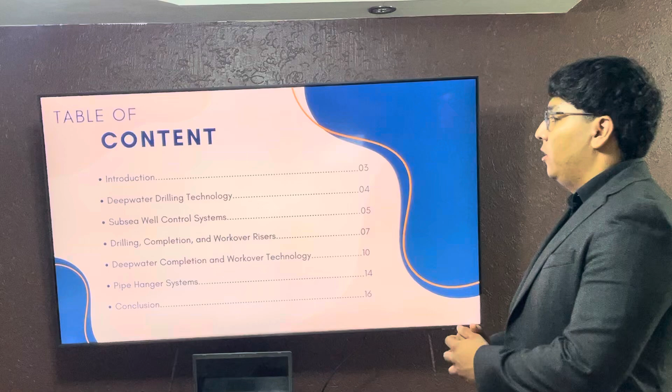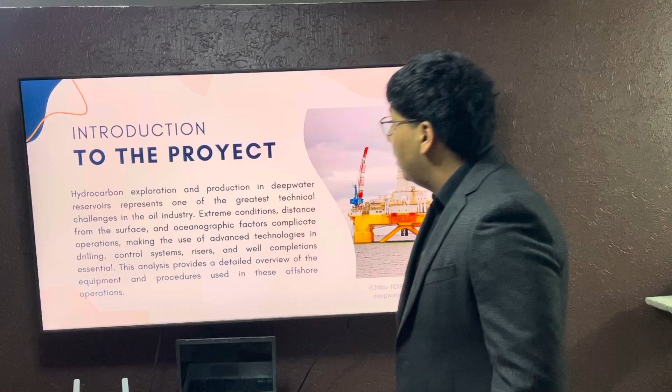For the table of contents, we have first an introduction, next deep water drilling technologies, subsea well control systems, drilling, completion and workover risers, deep water completions and workovers technology, pipe hanger system, and to finish we have a conclusion.

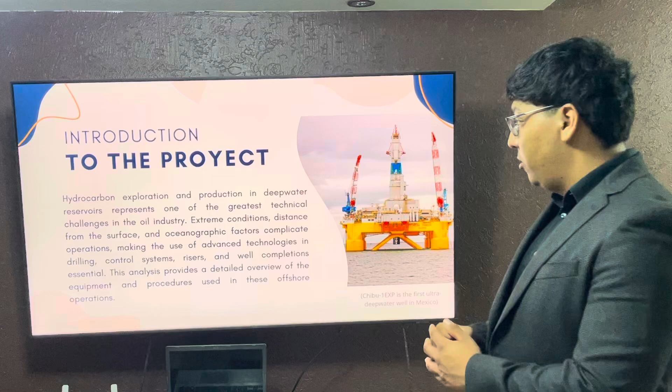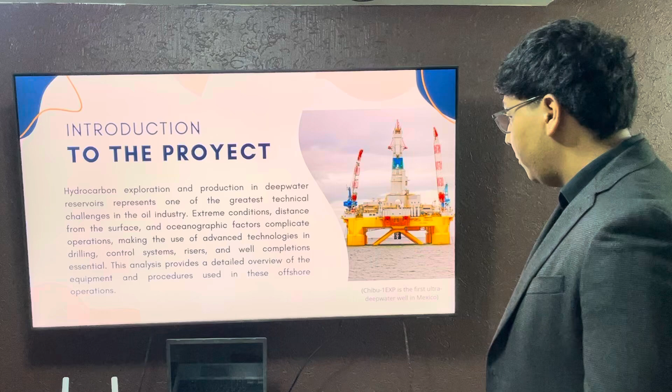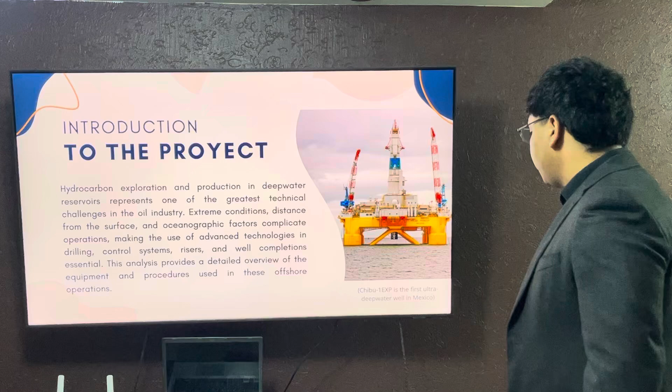For the introduction to the project, hydrocarbon exploration and production in deep water reservoirs represents one of the greatest technical challenges in the oil industry. The extreme conditions, distance from the surface, and oceanographic factors complicate the operations, making the use of advanced technologies in drilling control systems, risers, and well completions essential. This analysis provides a detailed overview of the equipment and procedures used in these offshore operations. And we have an image of the first ultra deep water well in Mexico.

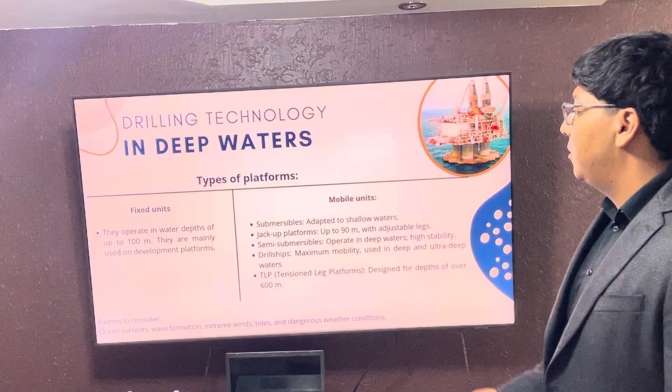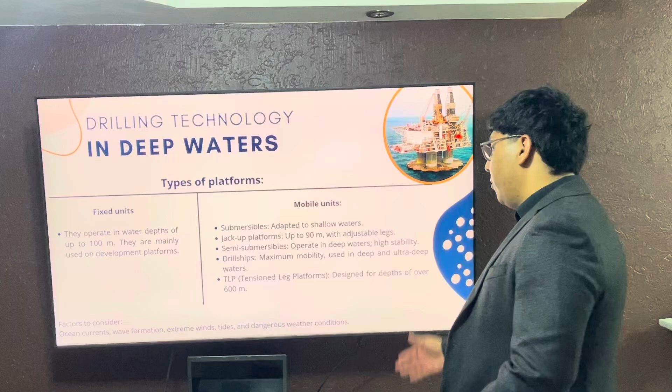Next, in drilling technologies in deep water, we have two types of platforms. Fixed units operate in water depths of up to 100 meters, and they are mainly used on development platforms. For the mobile units, we have submersibles adapted to shallow waters, and jack-up platforms up to 90 meters with adjustable legs.

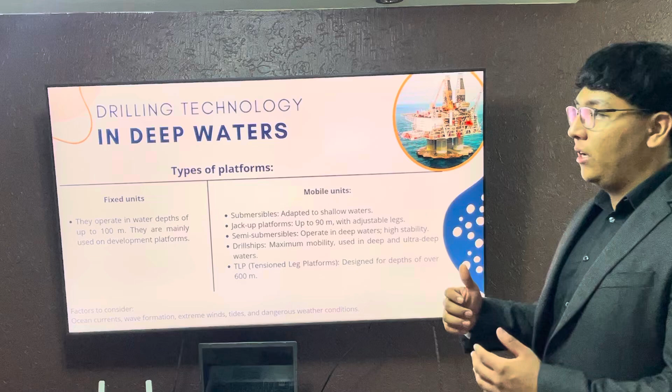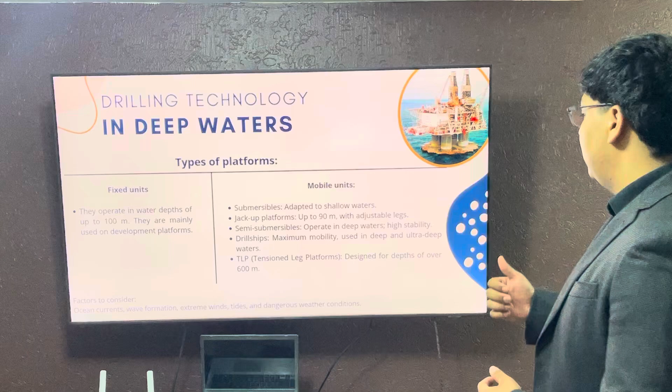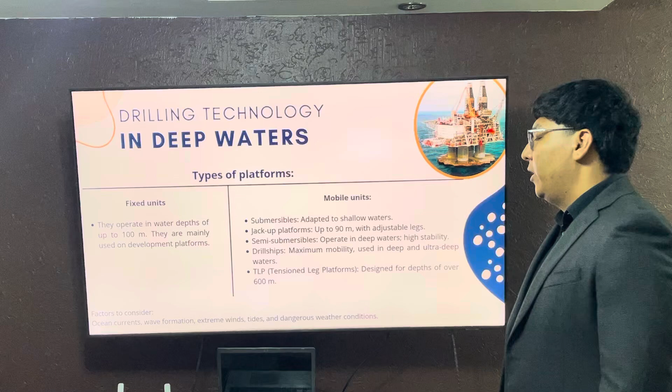Semi-submersibles operate in deep waters and have high stability. Drill ships have maximum mobility and are used in deep and ultra deep waters. And to finish, we have the TLP, that is, tension leg platforms, designed for depths of over 600 meters. For the factors to consider, we have ocean currents, wave formations, extreme winds, tides, and dangerous weather conditions.

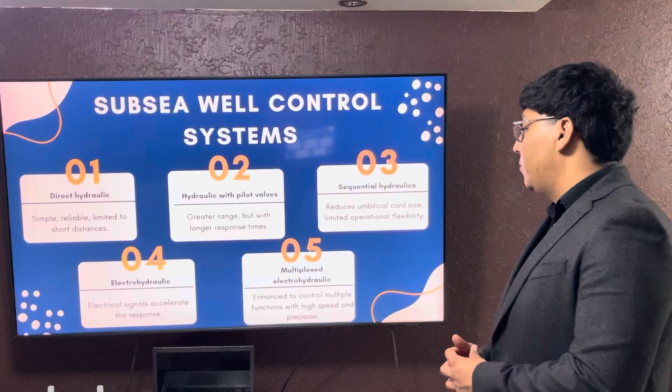In subsea well control systems, we have direct hydraulic, which is simple, reliable, and limited to short distances. Next, we have hydraulic with pilot valves, with greater range but longer response times. Next, we have sequential hydraulics, which reduce the umbilical size but limit operating flexibility.

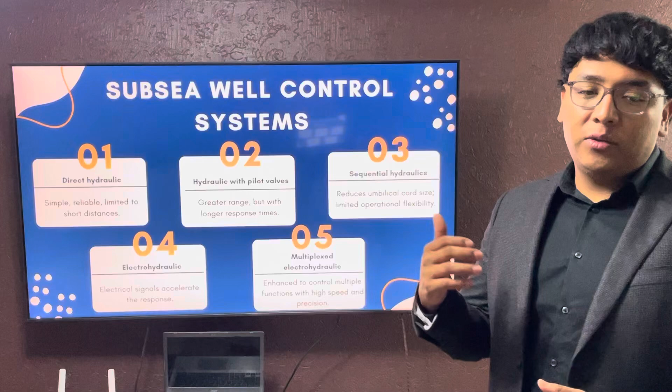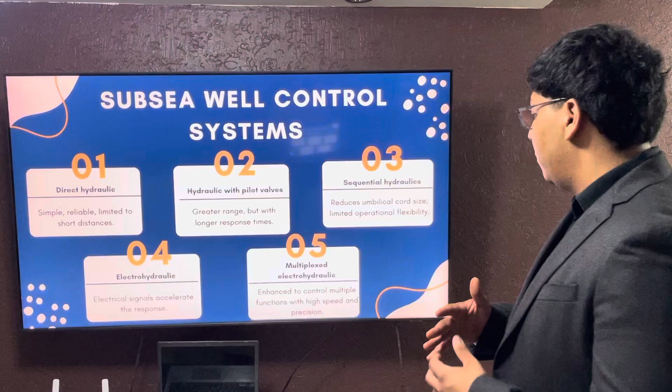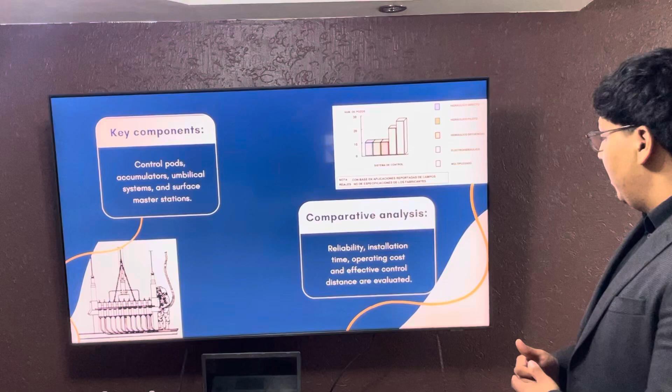In the case of electrohydraulic, it uses electrical signals to accelerate the response. And finally, multiplex electrohydraulics is in charge of controlling multiple functions with high speed and precision. Some key components are control pods, accumulators, umbilical systems, and surface master stations. In the comparative analysis, reliability, installation time, operating cost, and effective control distance are evaluated.

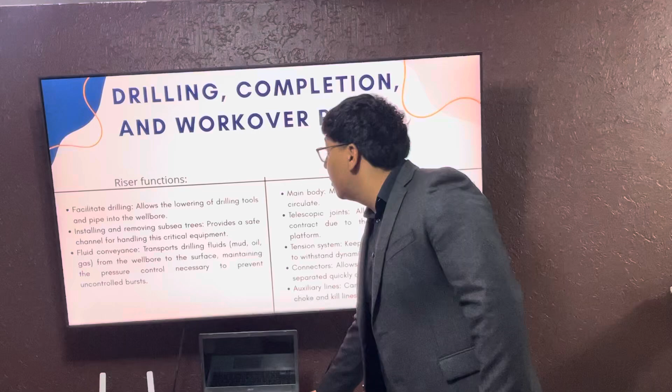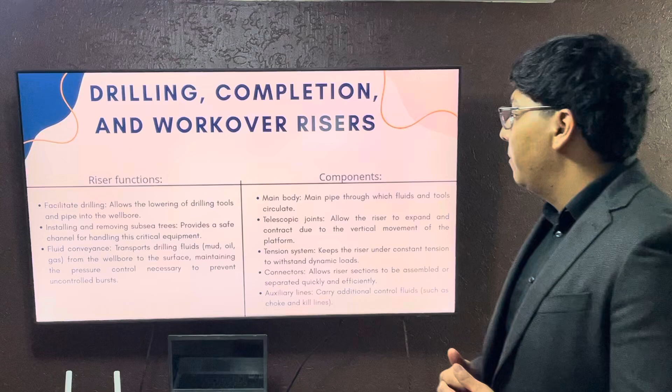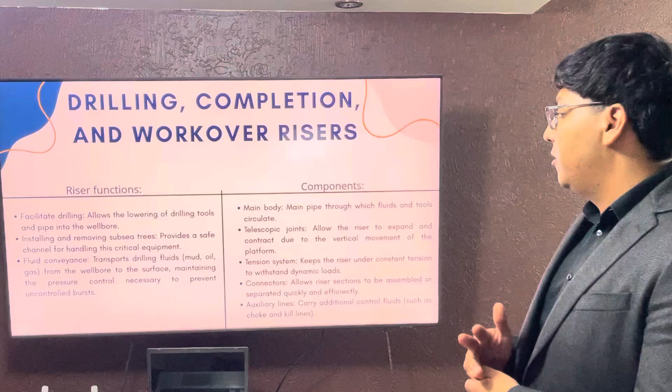Now, for drilling, completion and workover risers, the riser functions: it facilitates drilling, allowing the lowering of drilling tools and pipe into the wellbore, and installing and removing subsea trees, providing a safe channel for handling this critical equipment.

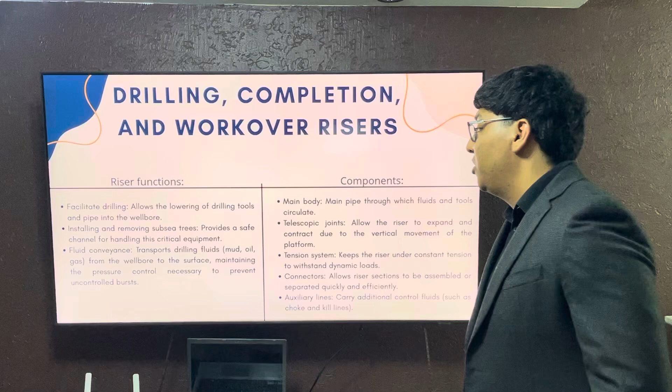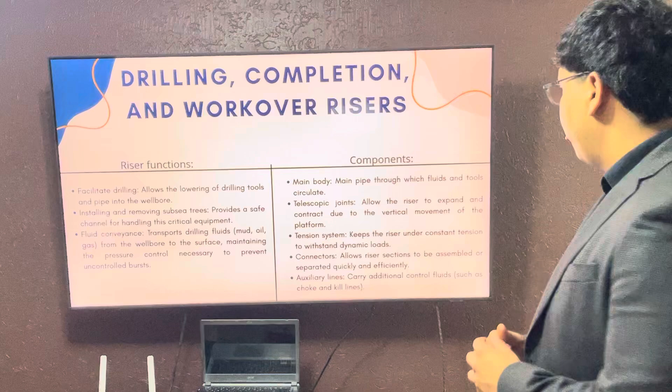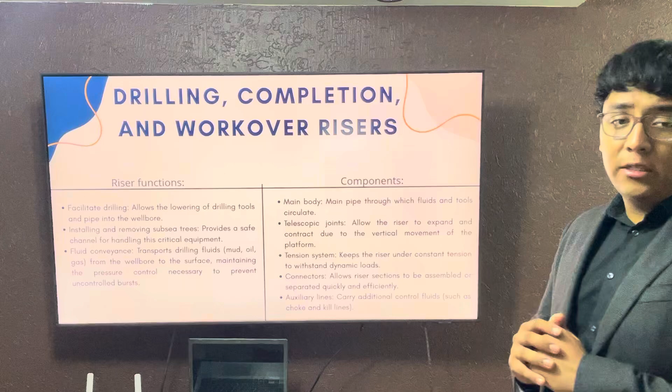And we have fluid conveyance, transporting drilling fluids like mud, oil, and gas from the wellbore to the surface, and maintaining the pressure control necessary to prevent uncontrollable bursts. For the components, we have the main body, the main pipe through which fluids and tools circulate. Telescopic joints allow the riser to expand and contract due to the vertical movements of the platform.

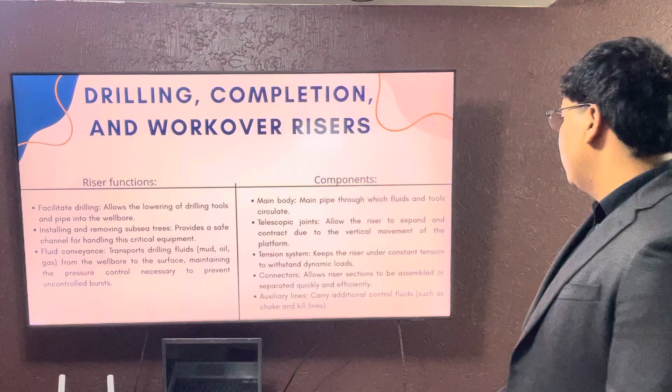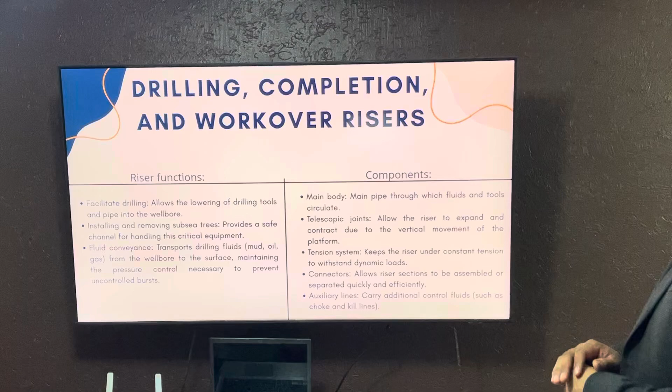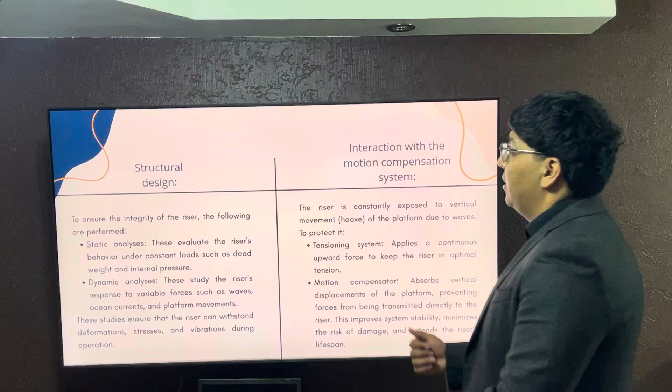The tension systems keep the riser under constant tension to withstand dynamic loads. Connectors allow riser sections to be assembled or separated quickly and efficiently. Auxiliary lines carry additional control fluids, such as choke and kill lines. The structural design is to ensure the integrity of the riser, and the following are performed.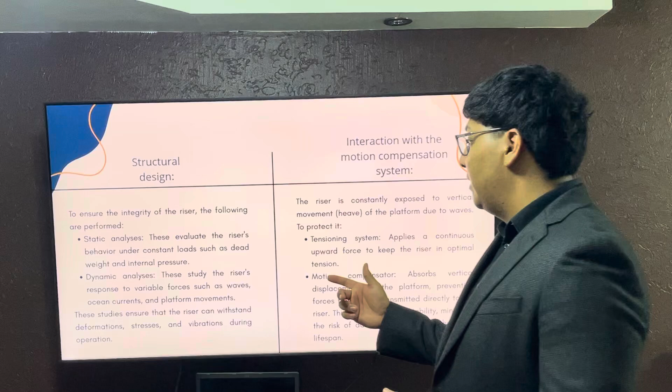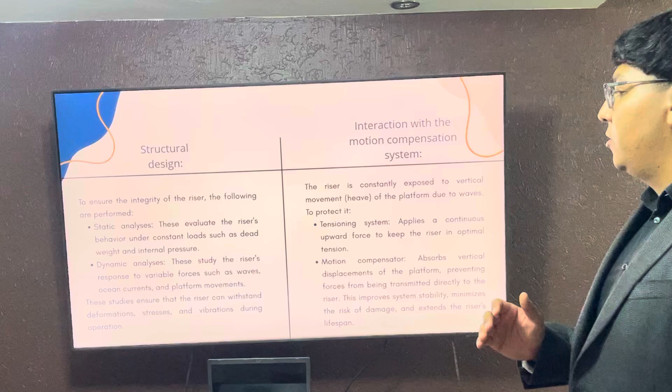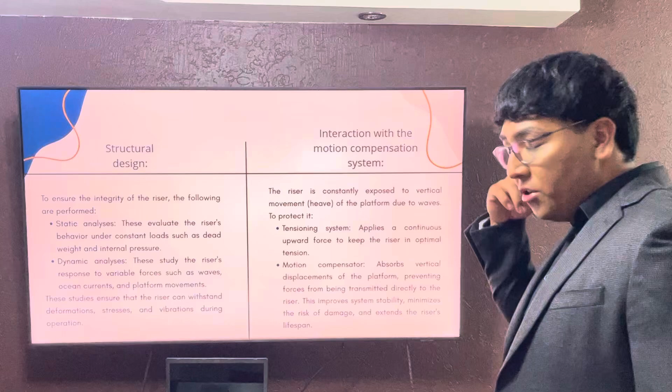We have a static analysis that evaluates the riser behavior under constant load, such as dead weight and internal pressure. A dynamic analysis is the study of the riser's response to variable forces such as waves, ocean currents, and platform movements. These studies ensure that the risers can withstand deformations, stresses, and vibrations during the operations.

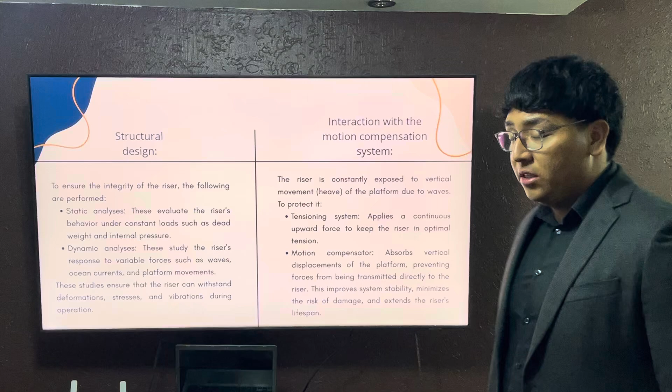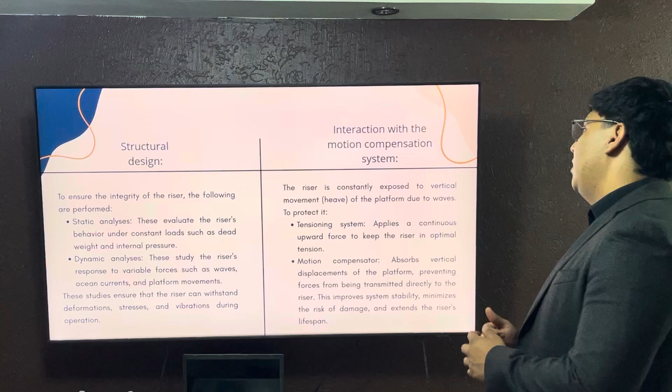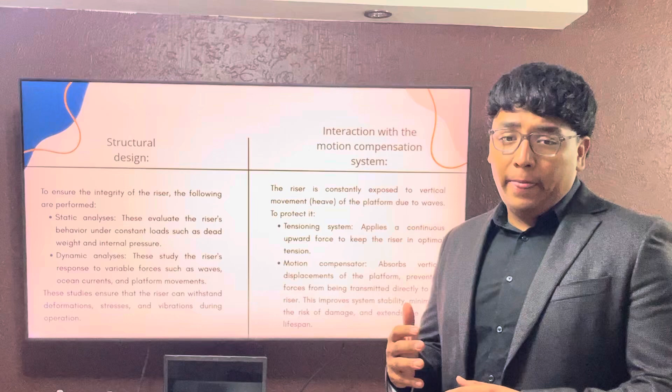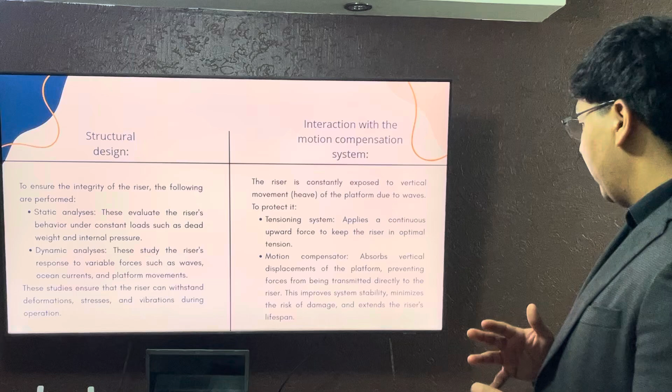In the case of the interactions with the motion compensation system, the riser is constantly exposed to vertical movements of the platform due to waves. To protect it, we have tensioning systems, that is a continuous upward force to keep the riser in optimal tension. The motion compensator absorbs vertical displacement of the platform and prevents force from being transmitted directly to the riser. This improves system stability, minimizes the risk of damage and extends the riser lifespan.

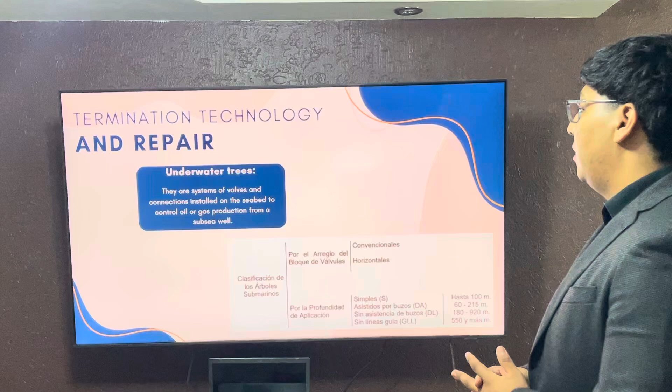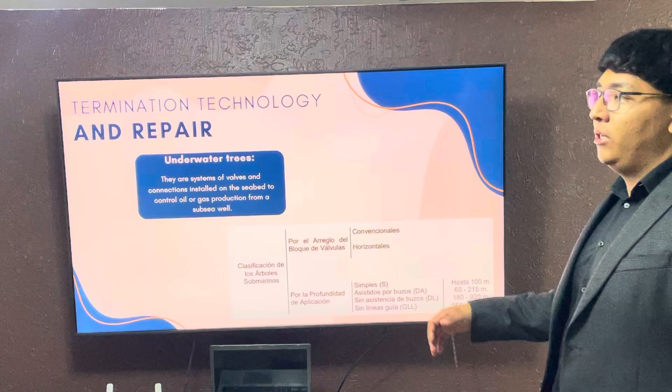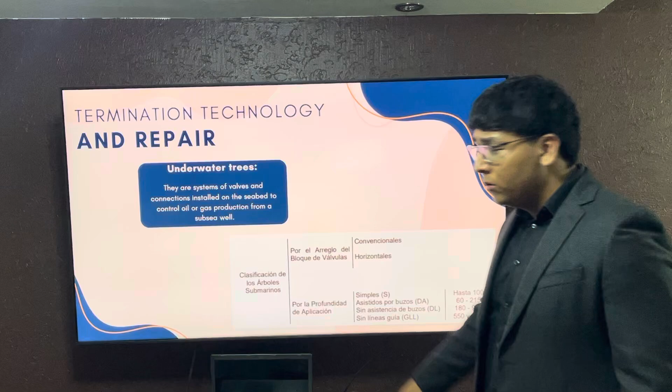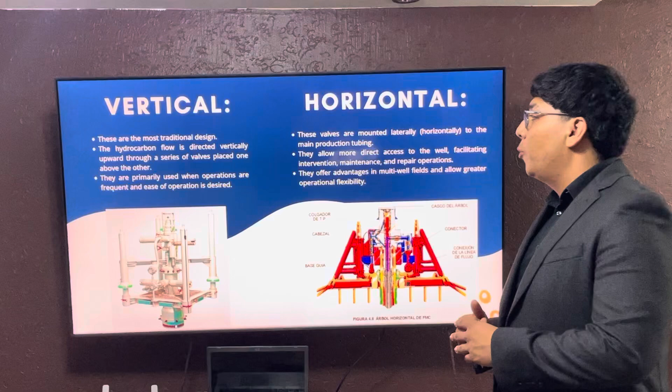For this image, sorry that I put it in Spanish, but in the book that I took the information from, it appears in Spanish. So I'm talking about classifications of underwater trees on a greater scale, and we have vertical, these are the most traditional design. The hydrocarbon flow is directed vertically upward through a series of valves placed one above the other. They are primarily used when frequent operations and easy operation are desired.

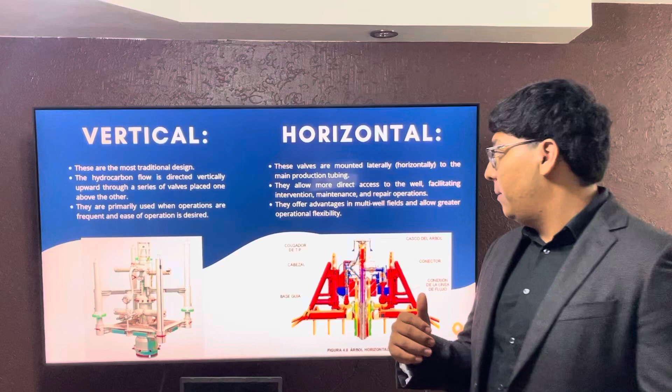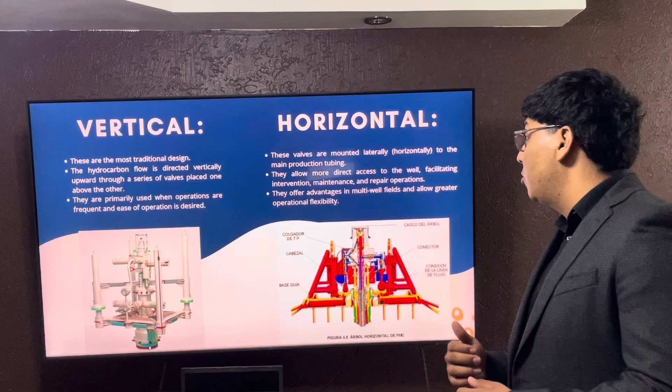For the horizontal, these valves are mounted laterally to the main production tubing. They allow more direct access to the well, facilitating interventions, maintenance, and repair operations. They offer advantages in multi-well fields and allow great operational flexibility.

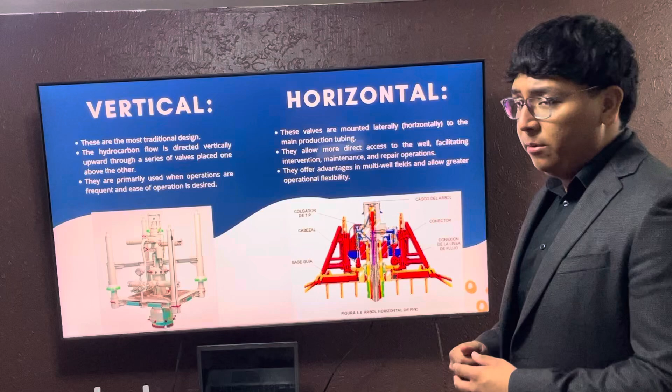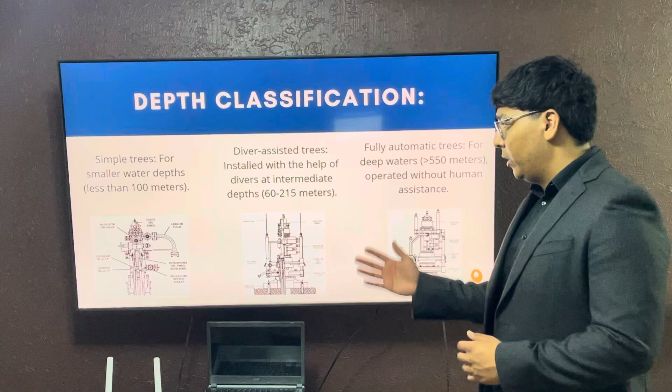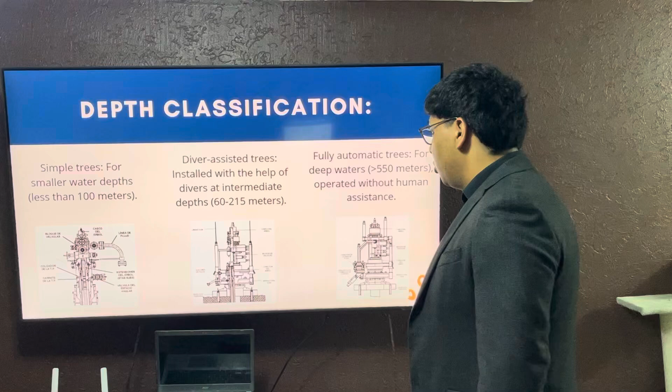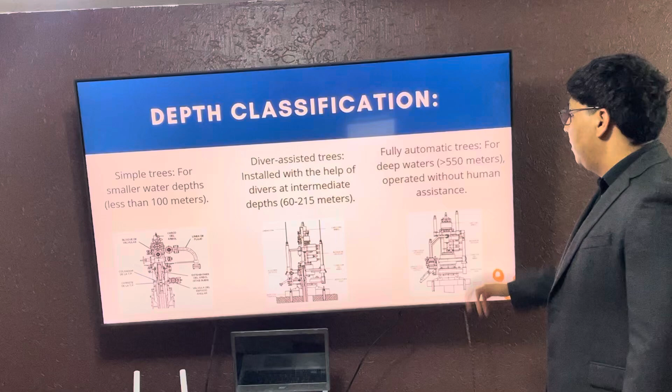For depth classifications, we have simple trees for shallow waters, less than 100 meters. Diver-assisted trees are installed with the help of divers at intermediate depths, from 60 to 215 meters. And finally we have the fully automatic trees for deep waters, like 550 meters, and operations without human assistance.

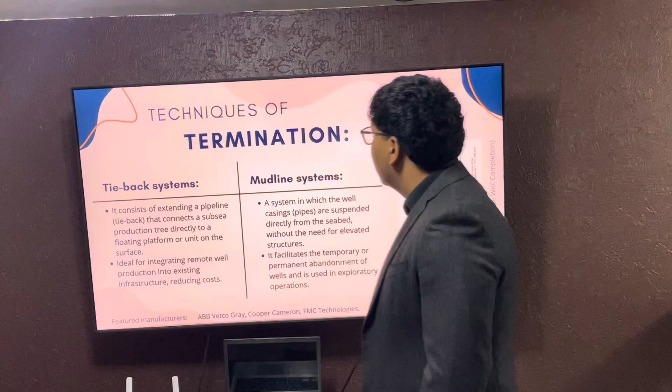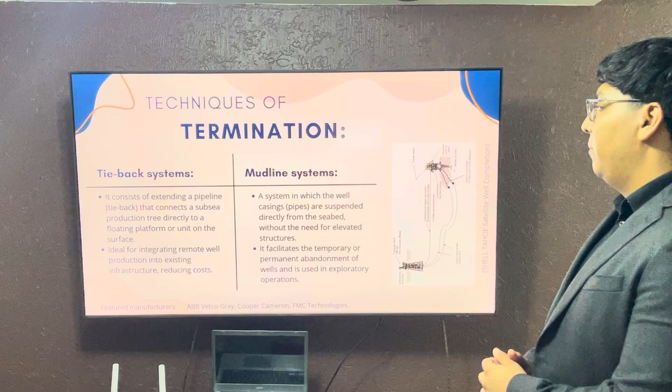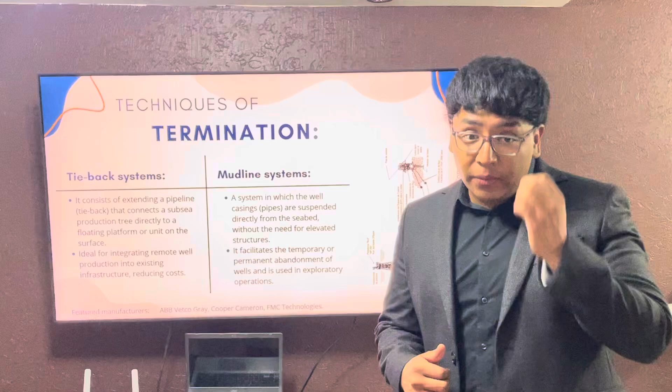In techniques of terminations, we have the tieback system. It consists of extending a pipeline that connects a subsea production tree directly to a floating platform or unit on the surface. It's ideal for integrating remote well production into existing infrastructure, reducing cost.

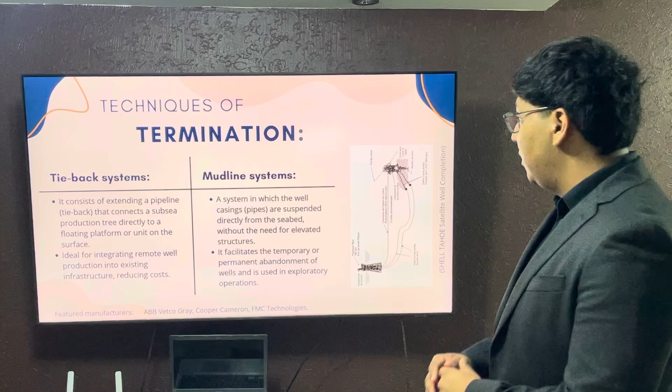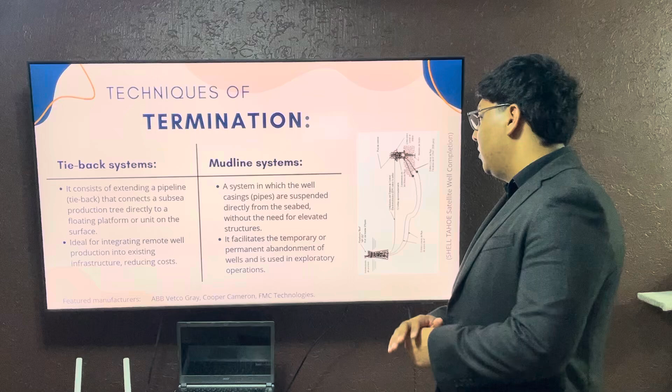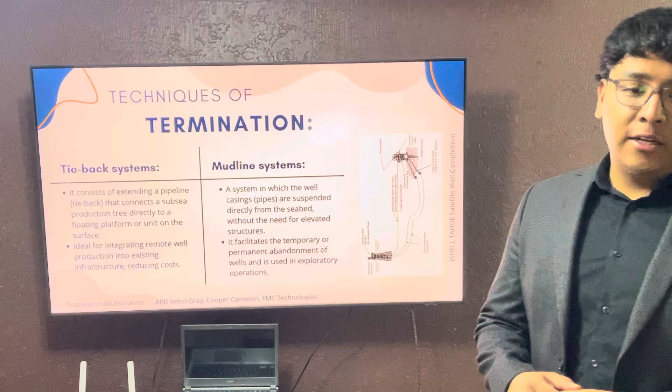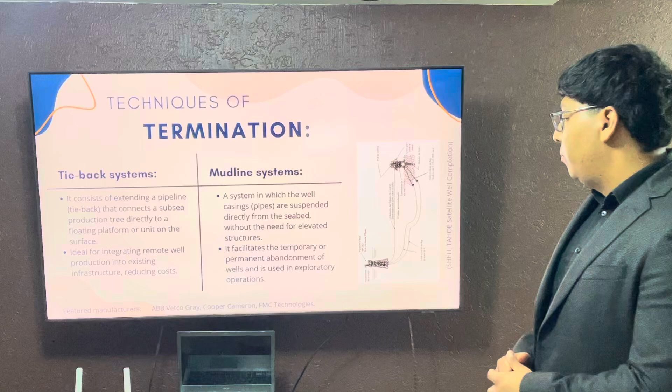The mudline system is a system in which the well casings are suspended directly from the seabed without the need for an elevated structure. It facilitates the temporary or permanent abandonment of wells and is used in exploration operations. As featured manufacturers, we have ABB Vetco Gray, Cooper Cameron, and FMC Technologies.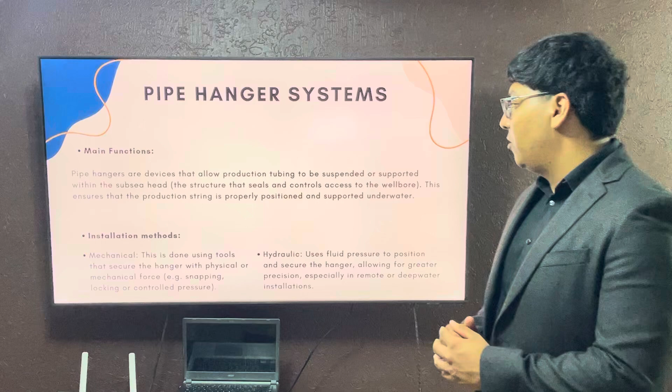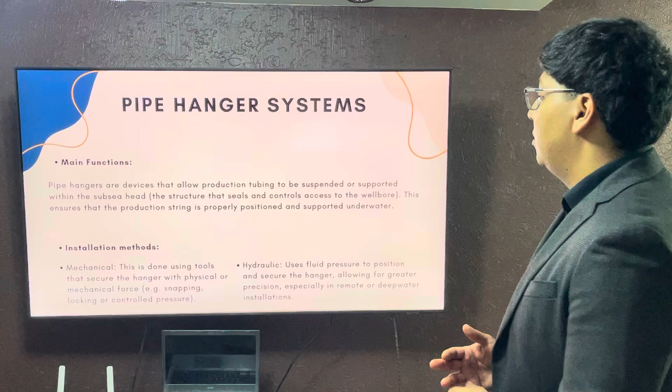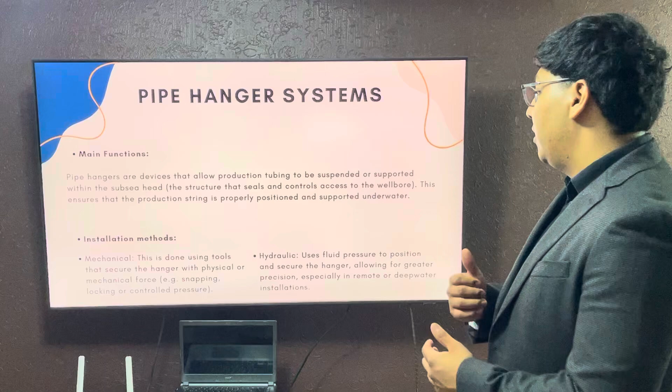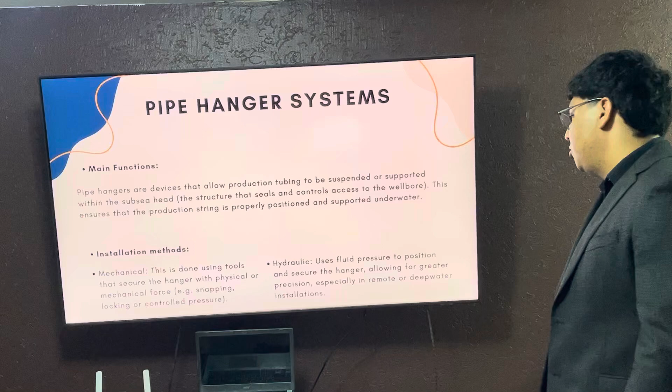Now the pipe hanger system, first the main functions. Pipe hangers are devices that allow production tubing to be suspended or supported within the subsea wellhead. This ensures that the production string is properly in position and supported underwater. For installation methods, first the mechanical, done using tools that secure the hanger with physical or mechanical force. In the case of hydraulic, it uses fluid pressure to position and secure the hanger, allowing greater precision, especially in remote or deep water installations.

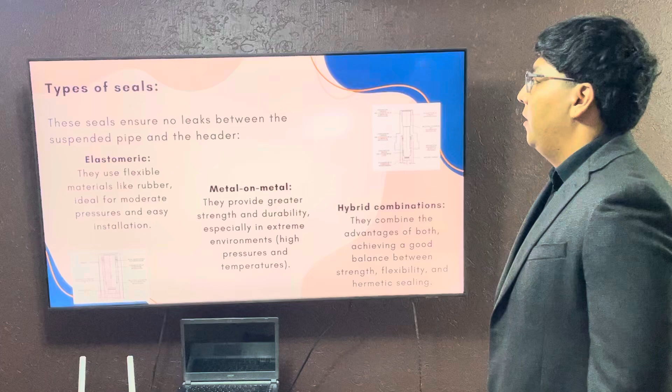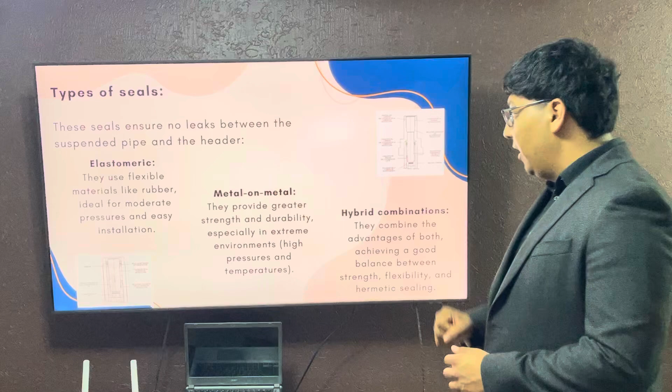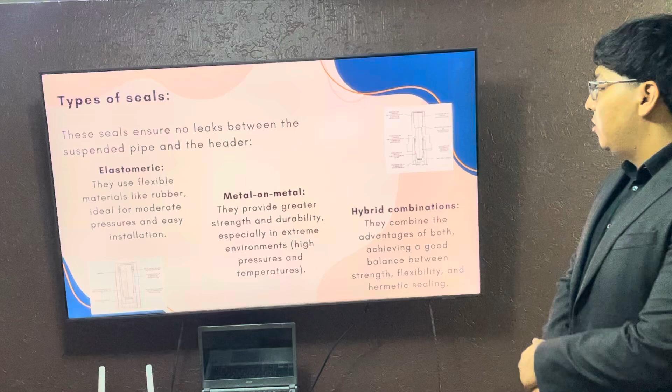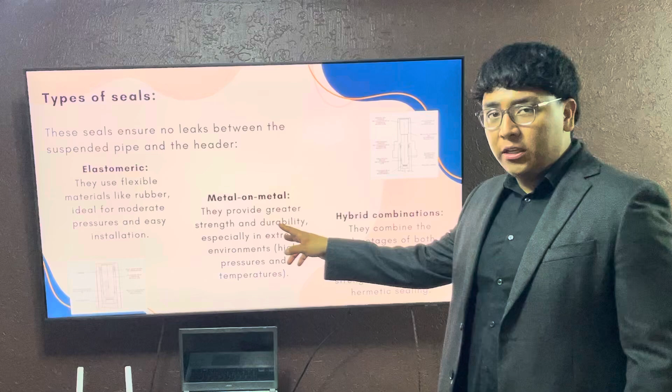We have types of seals. These seals ensure no leak between the suspended pipe and the header. The elastomeric ones use flexible materials like rubber, ideal for moderate pressure and easy installation. Metal-on-metal seals provide greater strength and durability, especially in extreme environments. Hybrid combinations combine the advantages of both, achieving a good balance between strength, flexibility, and hermetic sealing.

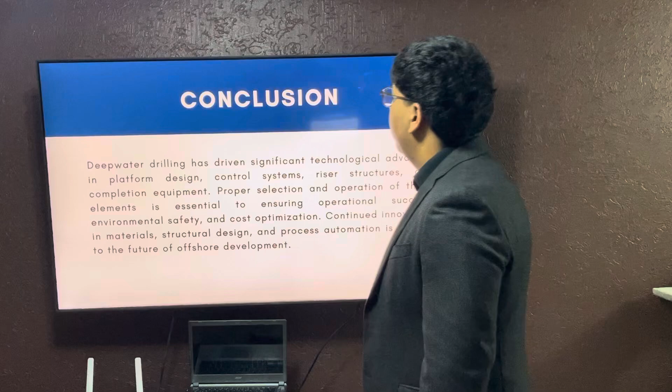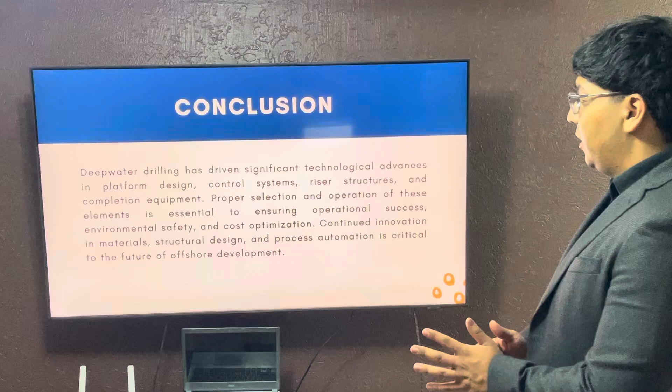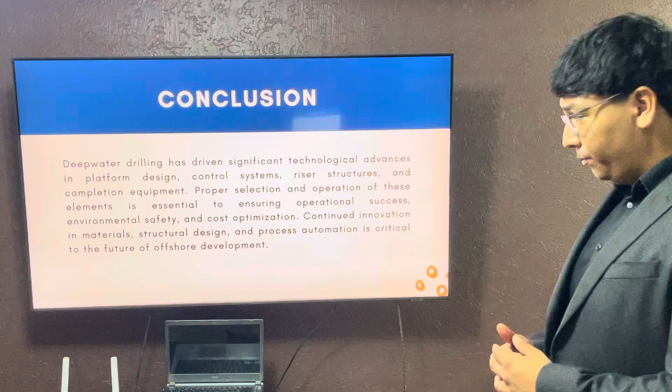And the conclusion. Deep water drilling is driving significant technological advances in platform design, control systems, riser structure, and completion equipment. Proper selection and operation of these elements is essential to ensuring operational success, safety and cost optimization. Continued innovation in materials, structural designs, and process automation is critical to the future of offshore developments.